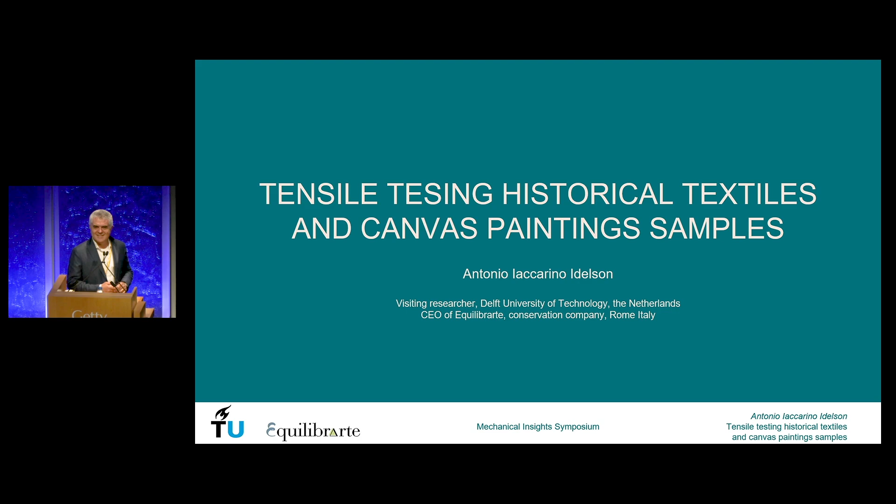So I'm going to present my PhD thesis, which I submitted in September and will discuss in a couple of months. This is a real first time for me, not only at Getty, but also for this specific subject, and I'm very pleased to do it here.

I really hope that the subjects I'm going to describe will open up for discussion, because one of the difficult things for me was that part of the research I've done did not find much correlation with existing literature. So basically, I felt a bit alone.

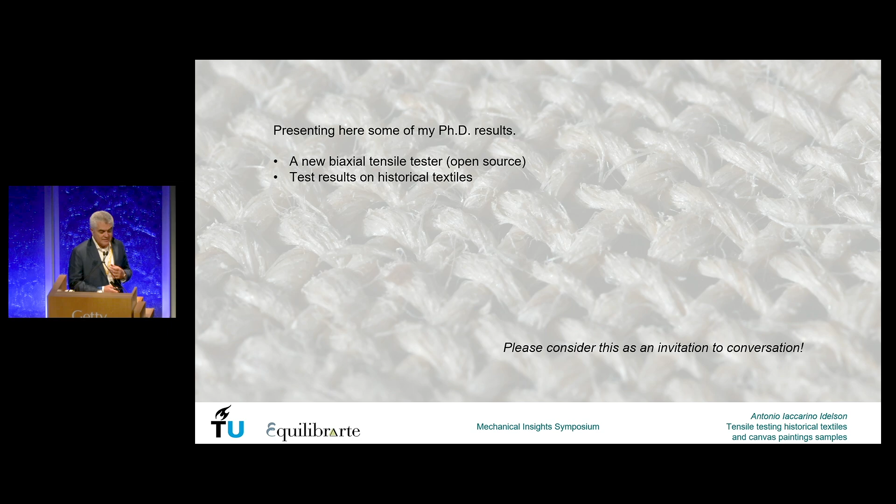The first part is going to be about the construction of a machine, which is not entirely new, because there have been several biaxial testers in conservation science history.

The other part is going to be the quantification of historical textile morphology. The point is that when I was about to test the mechanical properties of historical textiles, I realized there was very little literature about the quantitative description of the yarns inside the textile. I'll give a very short presentation of this, and luckily I have a poster with much more information, so hopefully we'll have time to discuss.

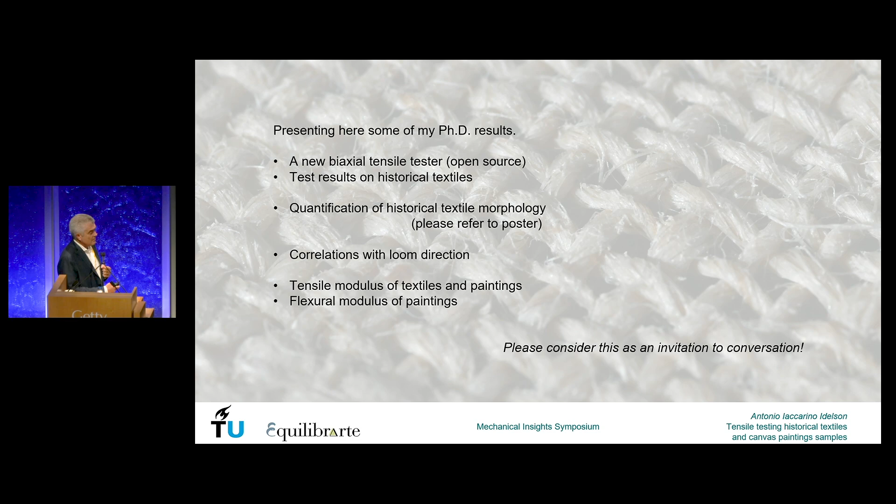The next important points are the tensile modulus of textiles and naturally aged paintings, and the flexural modulus of paintings. Let's go ahead.

This is the machine I built during the first year of my PhD. It was a collaboration with my precious friend, Dr. Miguel Sanchez at Polytechnic University of Valencia.

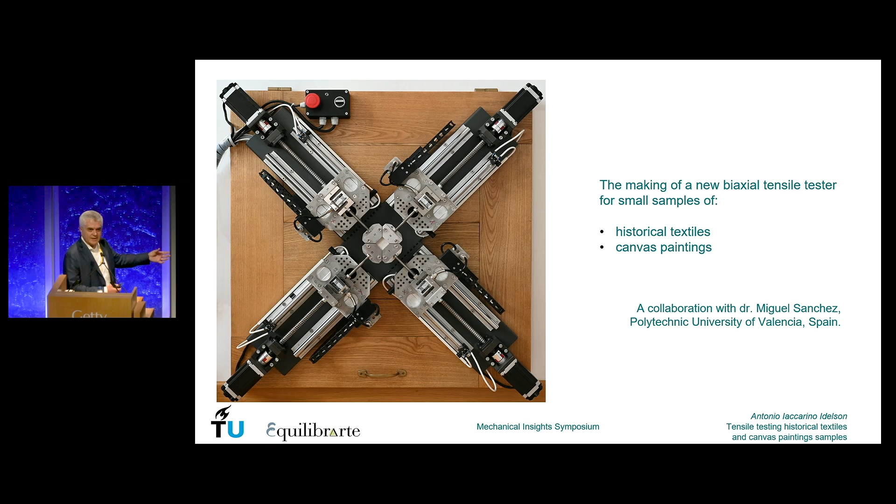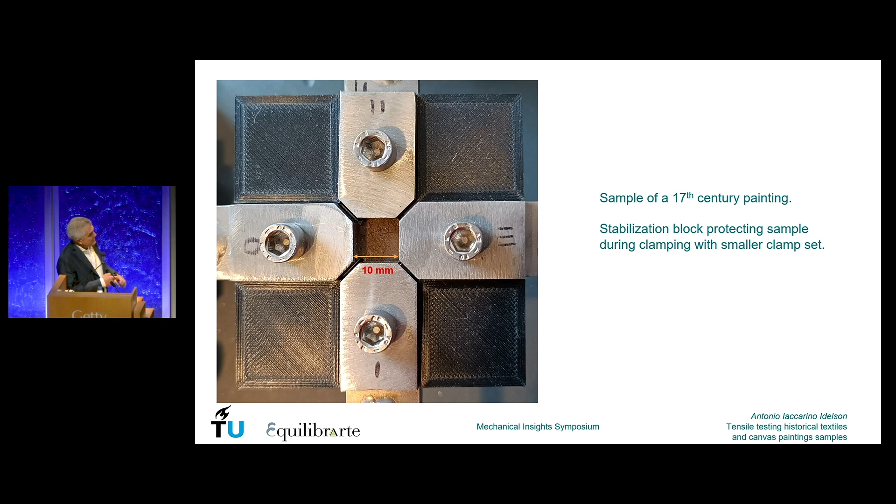We worked during COVID - I was in Rome, he was in Valencia, and he wrote the software while I made the machine. These are the small clamps for the sample, which is 10 millimeters wide plus a clamping area. For clamping it safely without damaging it, I built a 3D printed support so it can be clamped without damaging the paint layers.

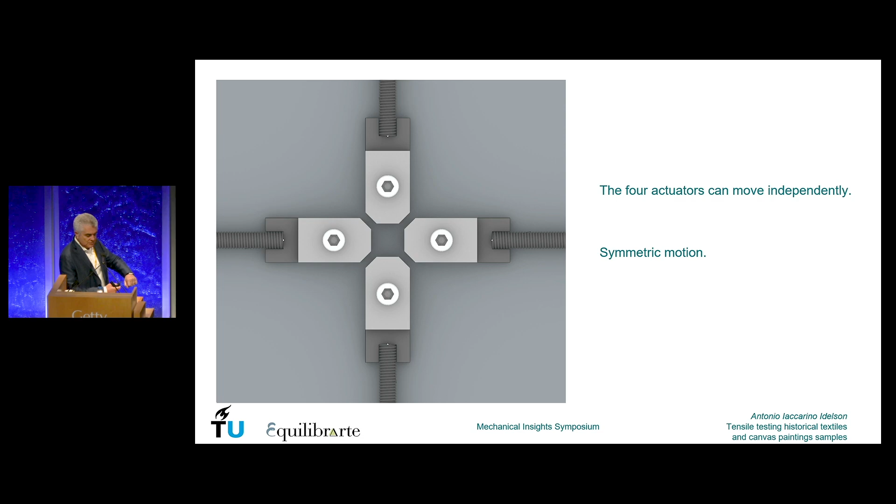The four actuators can move independently, with an asymmetric motion or with a symmetric motion. Asymmetric motion is useful for uniaxial testing, while symmetric motion is necessary for biaxial testing.

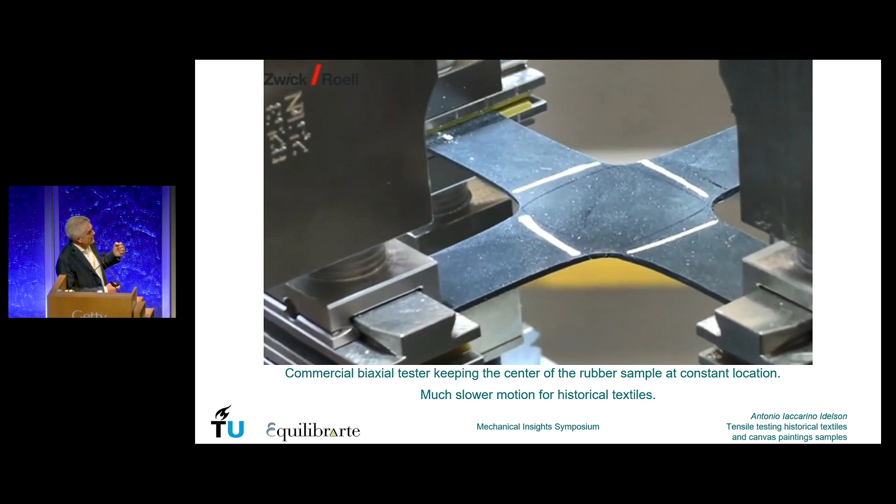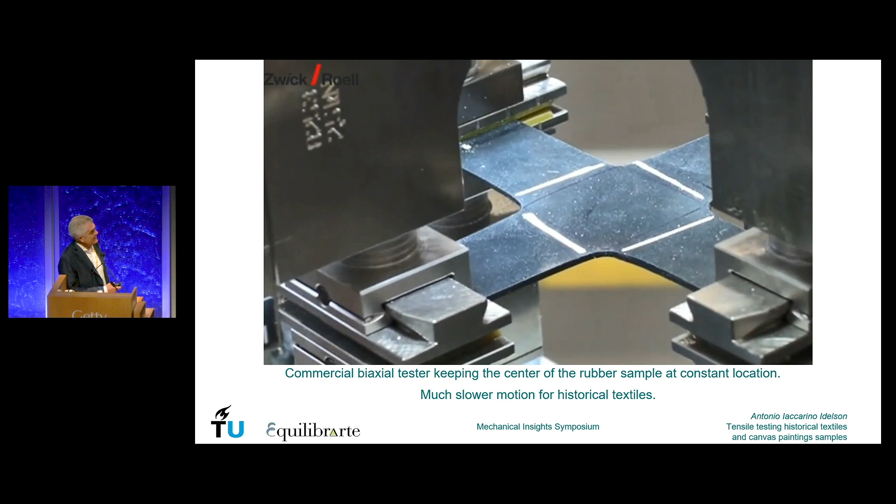This is a commercial biaxial tester with a symmetric motion. I showed this because you cannot do fast testing on an old sample, so this was available and nice. But the point is that when doing a biaxial tester, you want the center of the samples in the same location, because otherwise you get distortions.

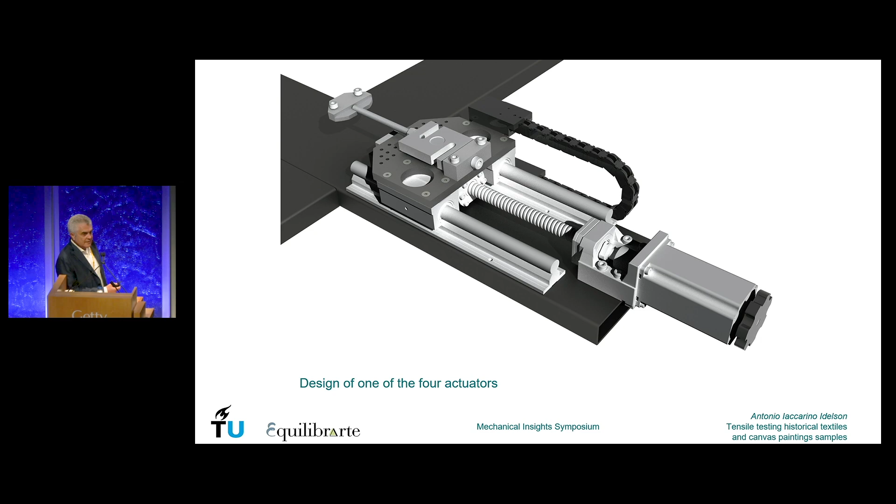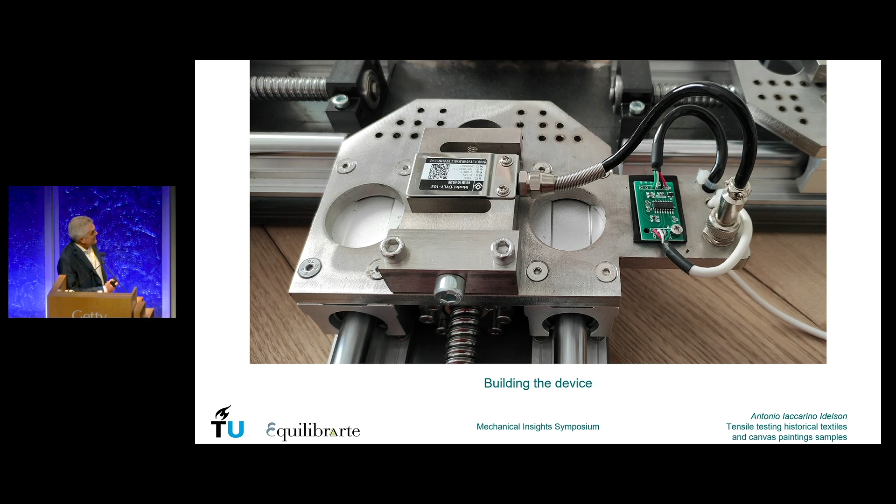This is the CAD drawing of one of the four identical actuators. I started from welding the steel cross, then had these parts laser cut and assembled - some parts were commercial, some were handmade.

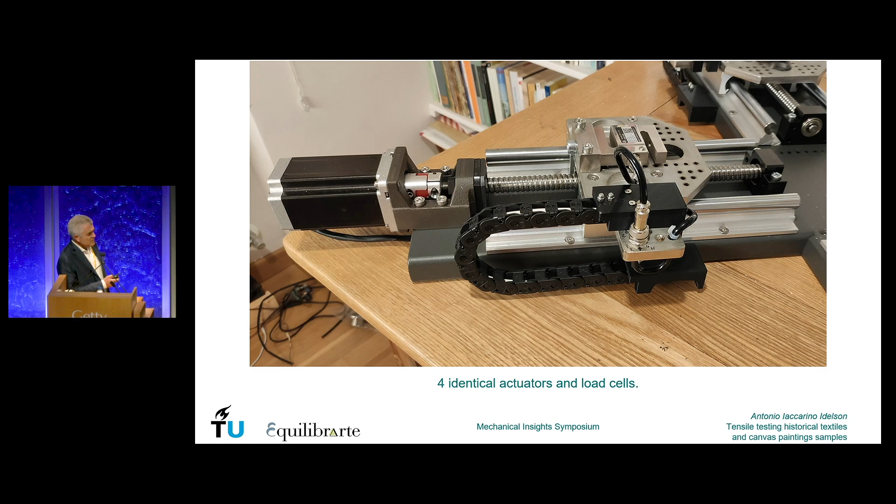This is the final execution of one of the identical actuators. You see that they have a load cell here, and each load cell reads the force on the sample.

In order to start with a symmetric disposition of the forces, we did a pretensioning algorithm that allows changing the force and position of each clamp at all times, for a relatively short time. In 100 seconds, you get to the pretension mean value of 0.3 Newton per centimeter, which is a quite low force - good for starting always in the same conditions.

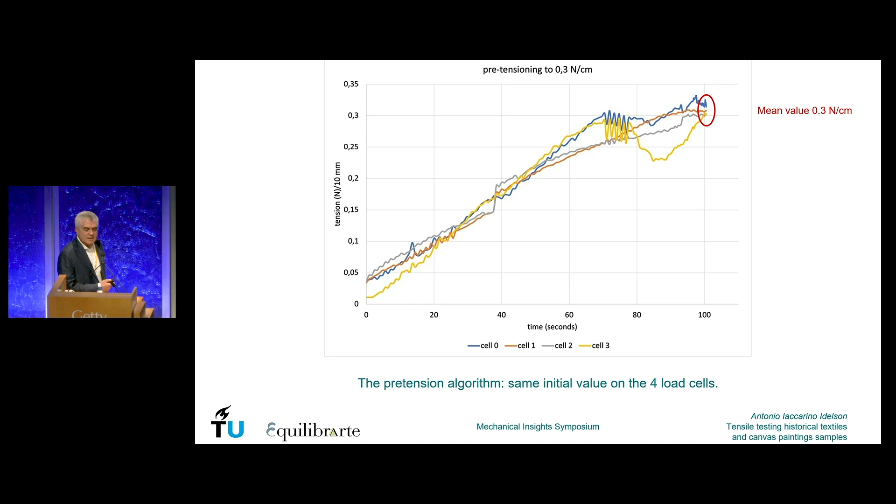So why was a new biaxial tester needed? The point is I'm a PhD student, but I'm also a conservator. I've been 35 years in conservation, and I started doing research on elastic tension of paintings in '92, when I was a student, and I never stopped basically.

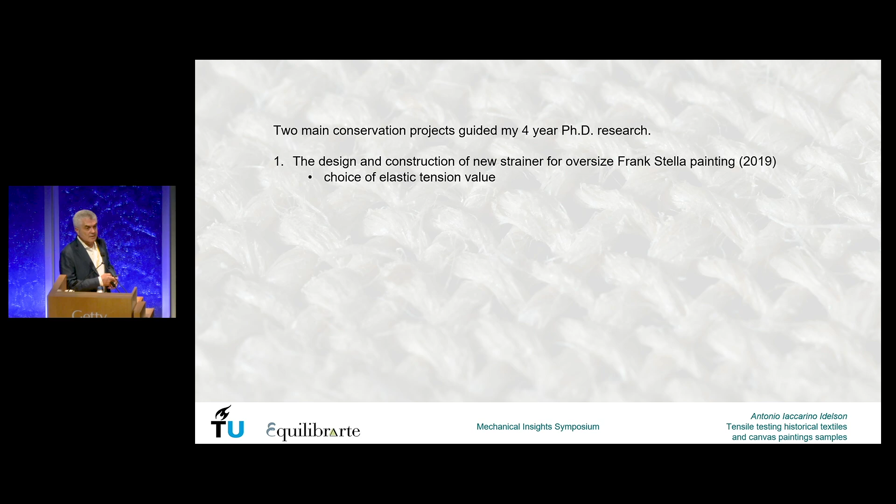My PhD research was based on two major conservation projects. One is the design and construction of a new strainer for the oversized Frank Stella painting, part of the Getty Conserving Canvas project in Santiago de Chile. The other is the design and construction of a new strainer for Rembrandt's Night Watch, and also the choice of the elastic tension, the value of the force.

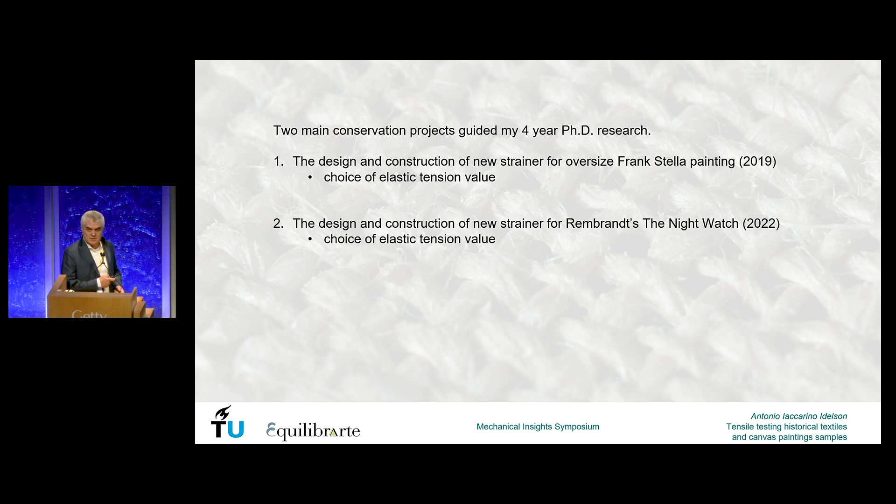Of course these are not very easy tasks, but I had enough experience for approaching them. The point is that I will show you what happened in the meantime.

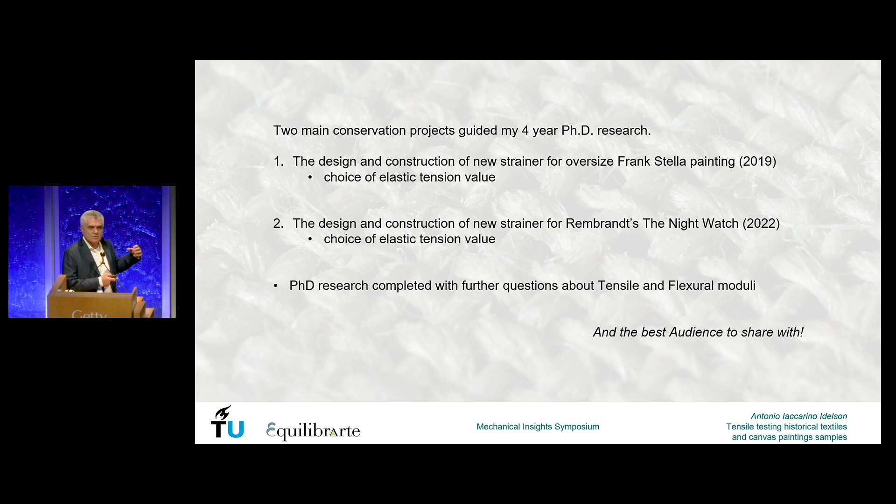This left me with two major questions about the tensile modulus and the flexural moduli, because it's not so easy to calculate them and use them for digital models, as we have seen already this morning.

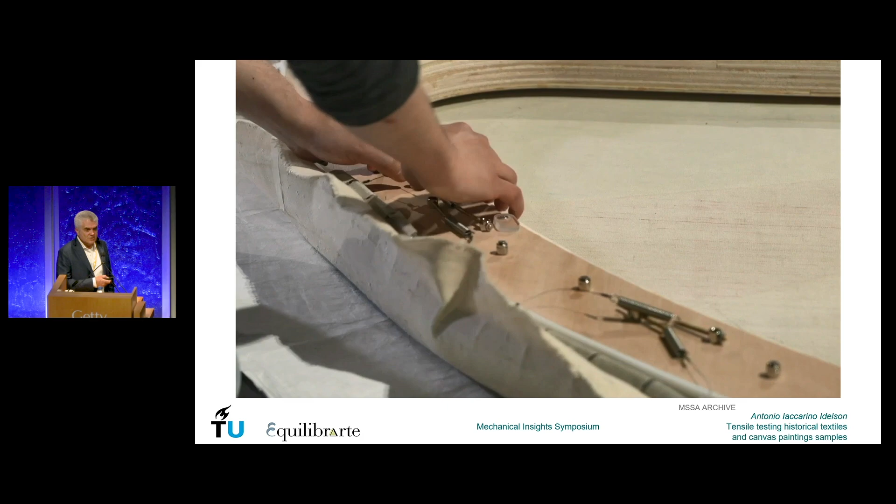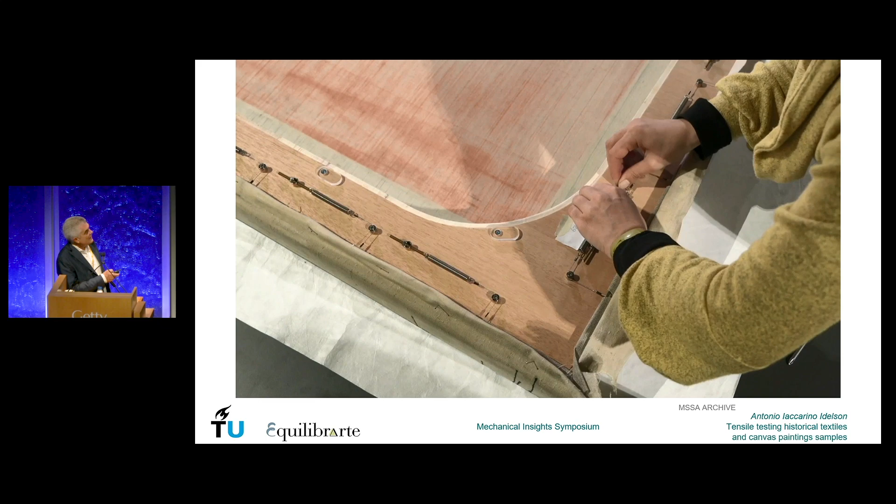This is the Frank Stella painting, and we did the tensioning system with springs that allow measuring the force. Here is the length of the spring for that location, and once you have the force selected, you can do simulations and predictions of the behavior of the painting.

So what we did was a simulation of the forces needed that were optimal for the painting, before I went to Santiago.

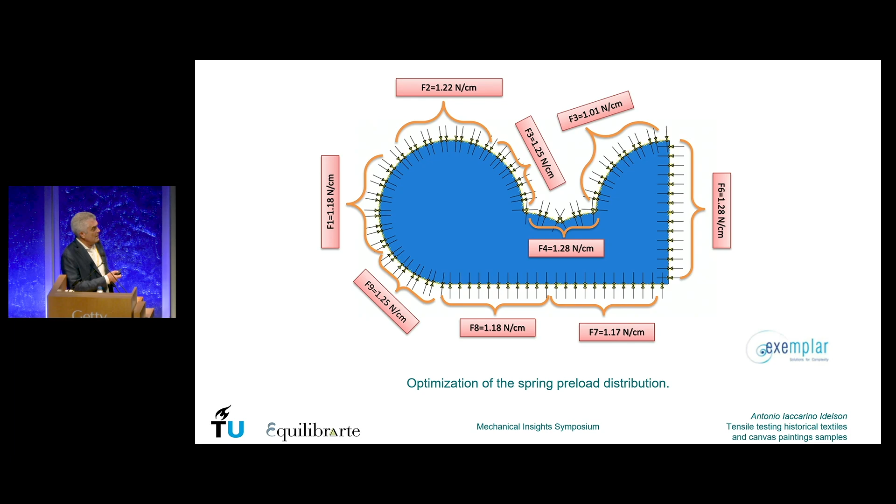Then when I arrived in Santiago, I was confronted with this prevision of the elongation of the painting, which was wrong. I mean, it didn't match with reality. I didn't see that much deformation in the painting.

What happened is that I had done uniaxial tests on samples of the same canvas with Alain Roche, who unfortunately couldn't come to this symposium, and we did it in warp, in weft, and at 45 degrees, and all these numbers were put into the FEM model.

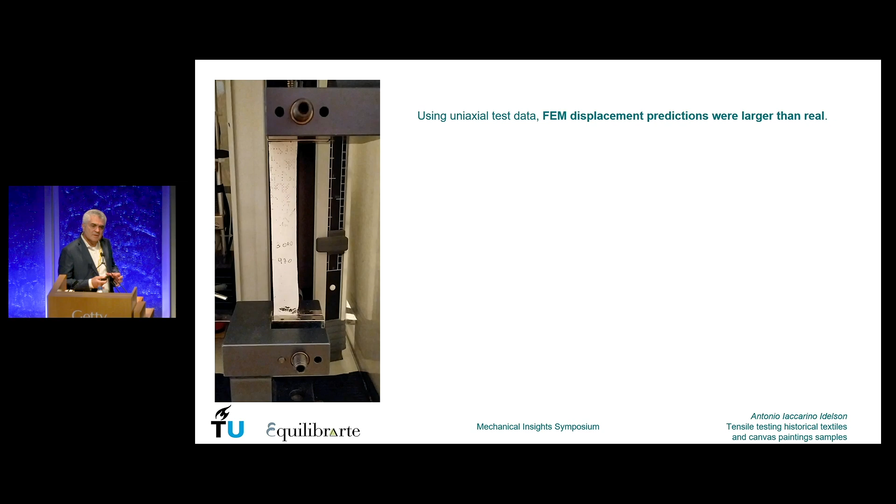But what happened is that the deformations were much larger than the real ones. So when I was there, I tried to figure out with the engineer in Torino what happened, and then I realized that as everything was okay with the model, the problem was with the uniaxial testing.

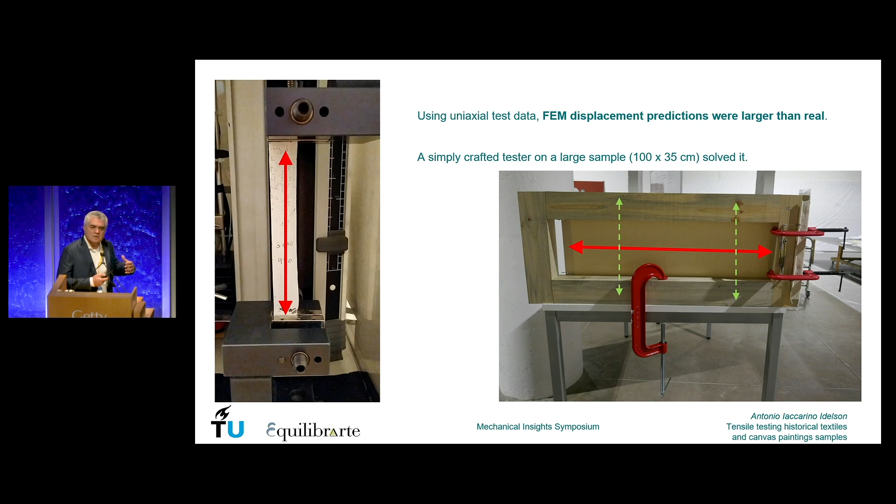So I built a biaxial tester with pieces of wood and springs and a caliper, and I did it in one day. The numbers I got with a much larger sample, 100 by 35 centimeters, even though it was a rougher estimation, were good enough to make the model fit. So I realized that a biaxial tensile tester was needed.

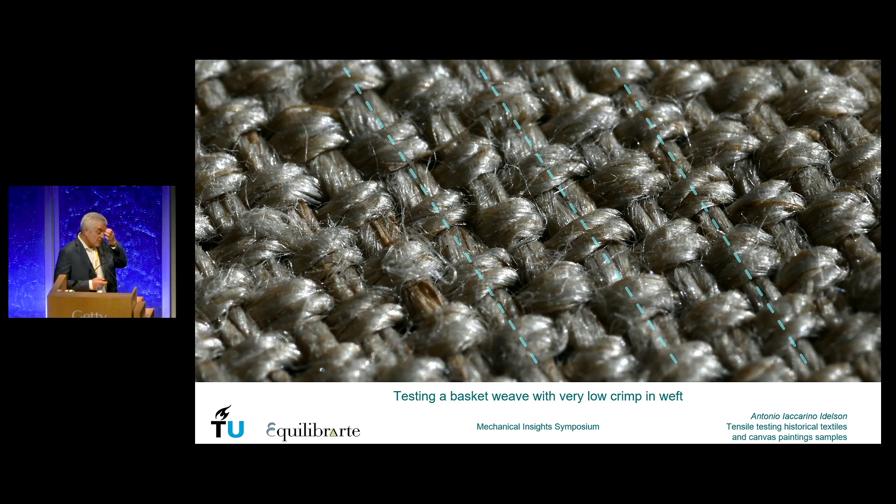This is a piece of basket weave lining canvas, which was actually used for the Night Watch, but we're not going to discuss this right now. You can see it has a very different shape in the yarns. These are the warp yarns; they are very crimped, and the weft yarns are very straight.

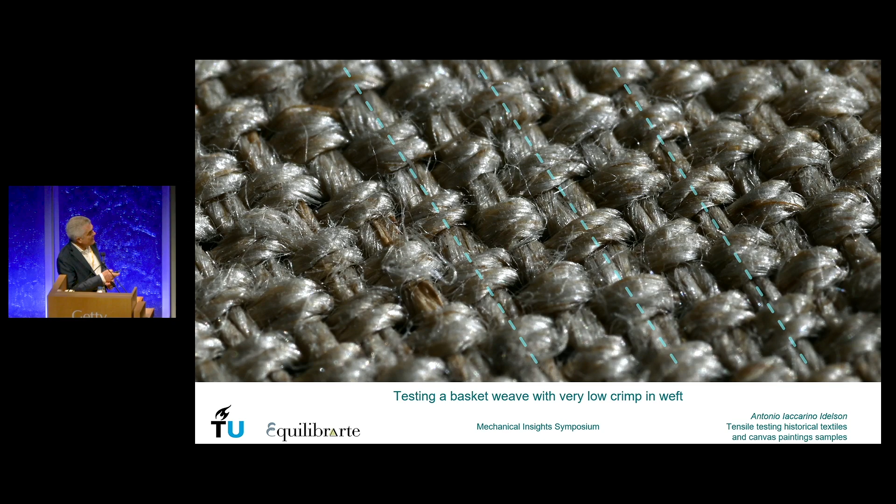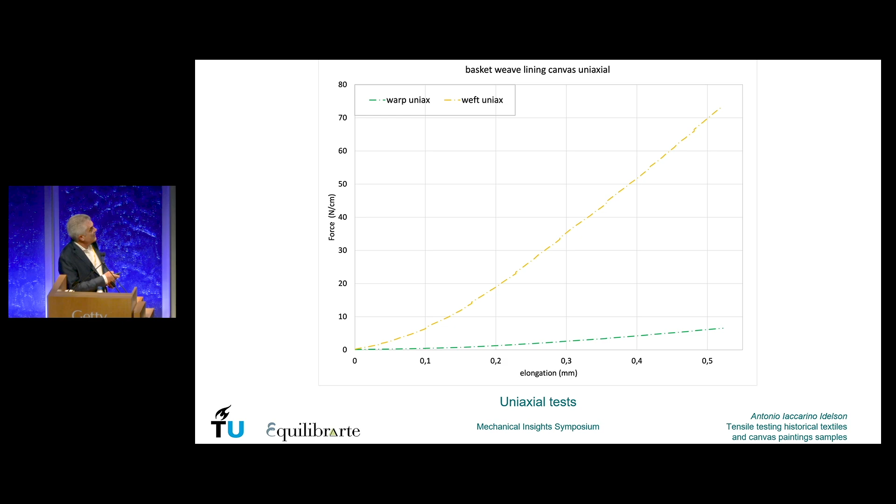If we do a uniaxial test, we see that the warp yarns are much more giving because they have a very important decrimping phase, while the weft yarns are much less so, they react more quickly. If we do a biaxial test on the same canvas, we see there is stiffness transfer: the warp yarns are a little bit stiffer, and the weft yarns lose some of their force.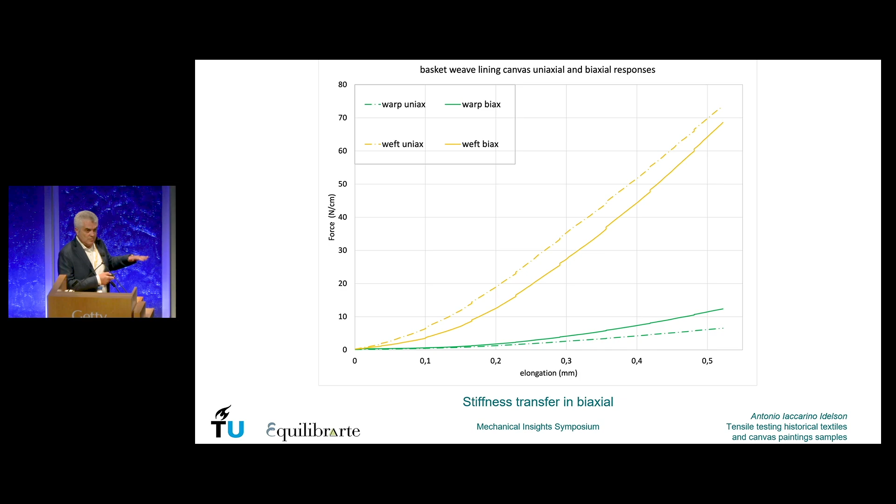If we look into the crimp values, we see that the weft yarns have only 1.6, while the warp have 7. This big difference makes the difference.

What was very interesting for me was not only to discover this, because it's been anticipated in many studies before, but that I measured the value of crimp in the canvas.

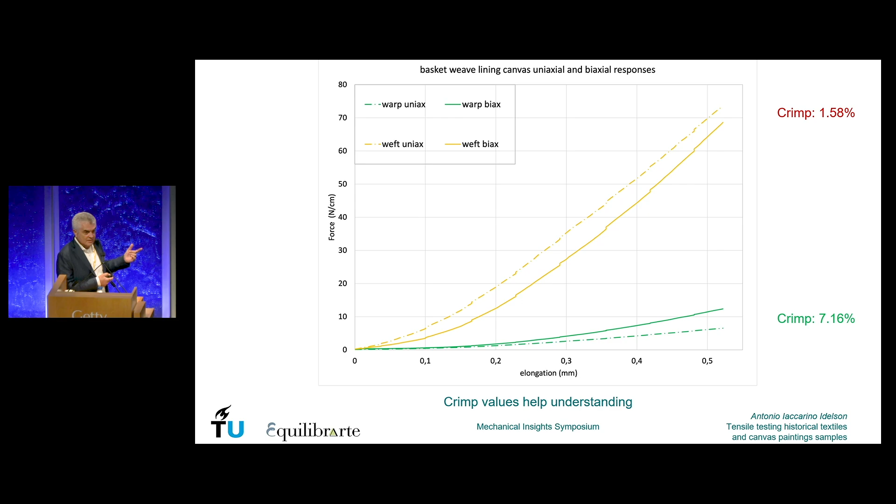Looking into 26 samples of naturally aged, old canvases, most of them from paintings, you see this is the full list, and we have the dates, and this was the lining canvas we saw just a second ago.

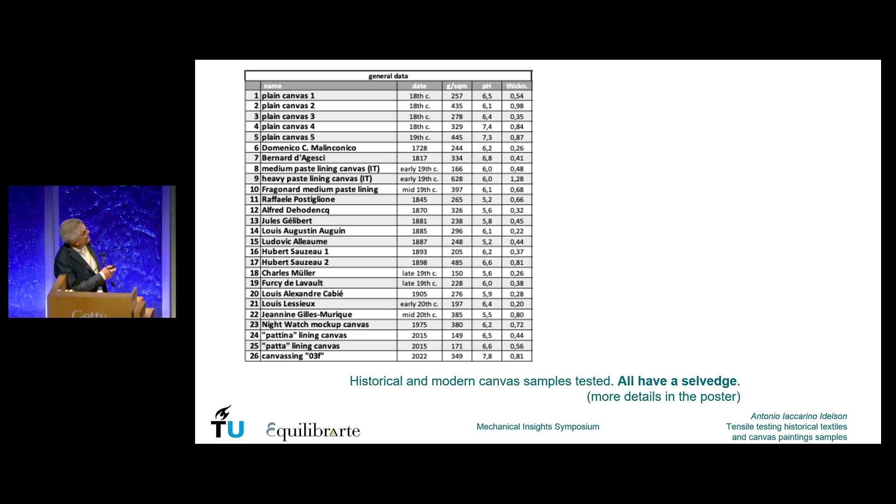Here we have general data like date, grams per square meter, pH, thickness of the canvas, and then we have the yarn width, which is not very commonly measured. I managed to do a sort of small statistical evaluation with at least a weighted mean.

I'll show you later. And then the yarn thickness also, because the yarns have an elliptical shape: the major axis is the yarn width, and the yarn thickness is the minor axis of the ellipse.

Then we have twist per meter, which is also very hard to find in the literature, but I found a 1973 paper that allowed me to do the measurement.

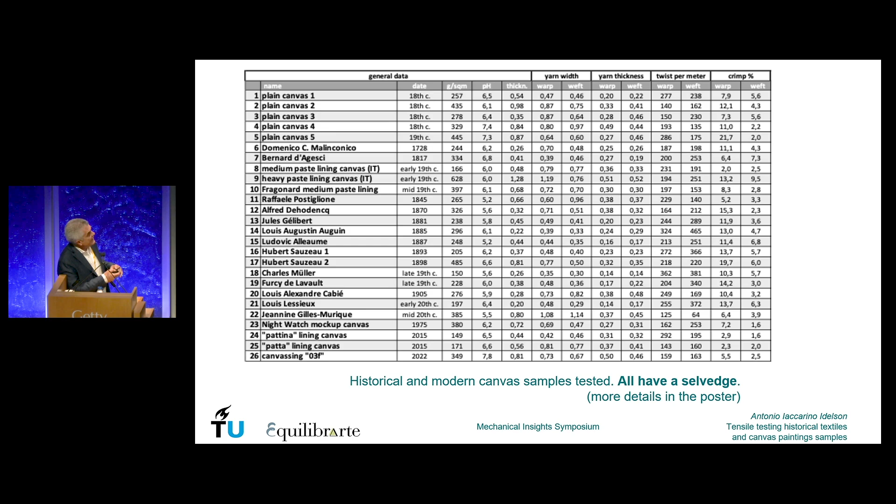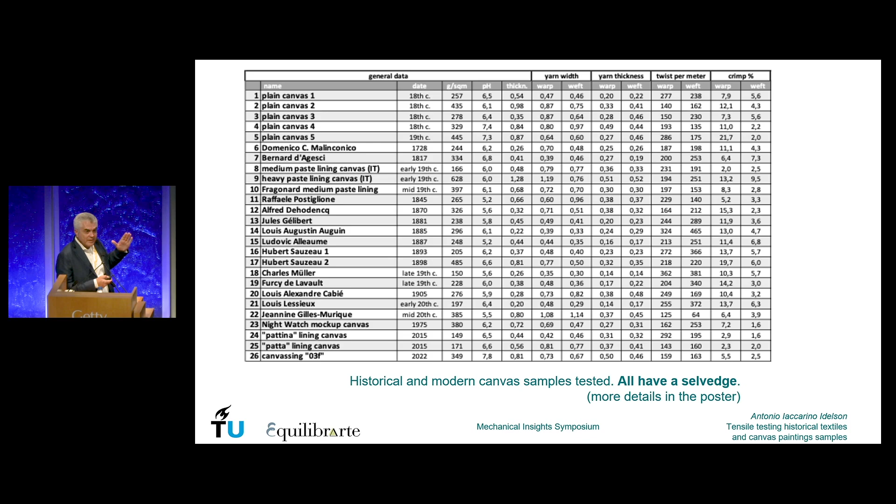And then the crimp, which is also a relatively complex thing to measure with old samples. Christina Young and others had used the Peirce model, which worked very nicely for modern canvases, but I tried it on mine and it was not working. I started again, it was really painstaking, and in the end I realized it simply did not apply to very complex waveforms, so I had to find another way.

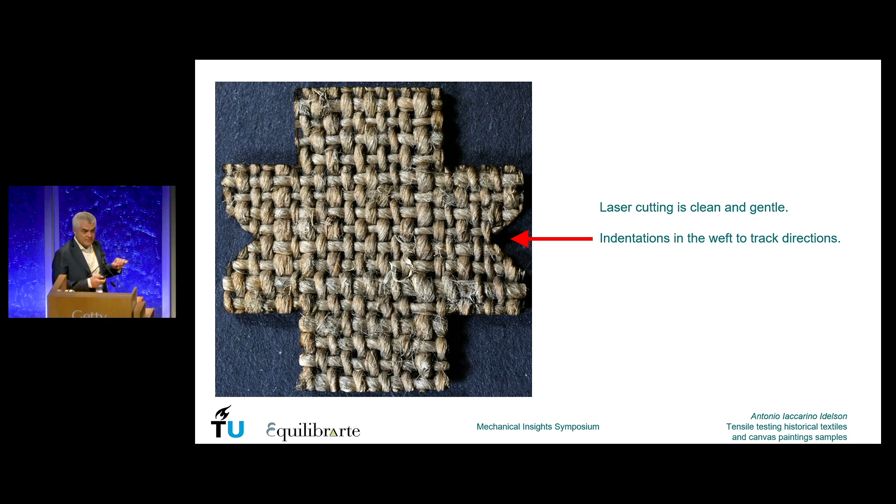And then the thread count. The samples are all laser cut, because laser cutting is gentle and doesn't cause mechanical damage to the samples. I draw indentations in the weft direction so I don't get confused when testing them, and keep track of the direction, with identical testing areas.

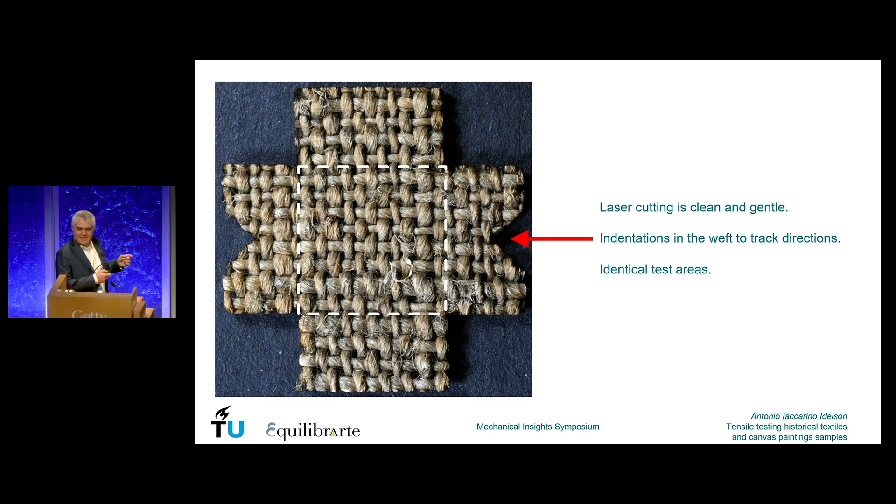So the weft yarns have higher modulus in 92% of the cases, that's 24 out of 26, in both modern and naturally aged old samples.

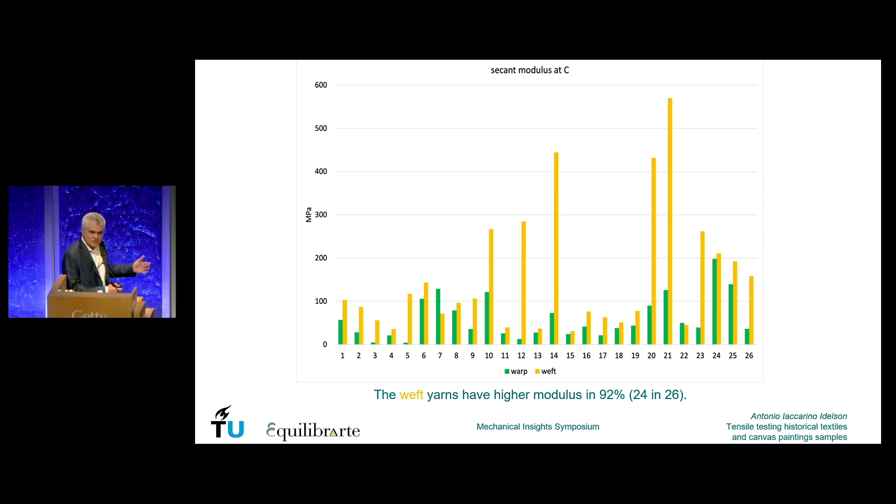If we look at the behavior of the decrimping zone, we see that crimp is definitely playing a role. And if we look at the crimp in the weft yarns, we see they have lower crimp also in 24 out of 26 samples, so we have a direct correlation.

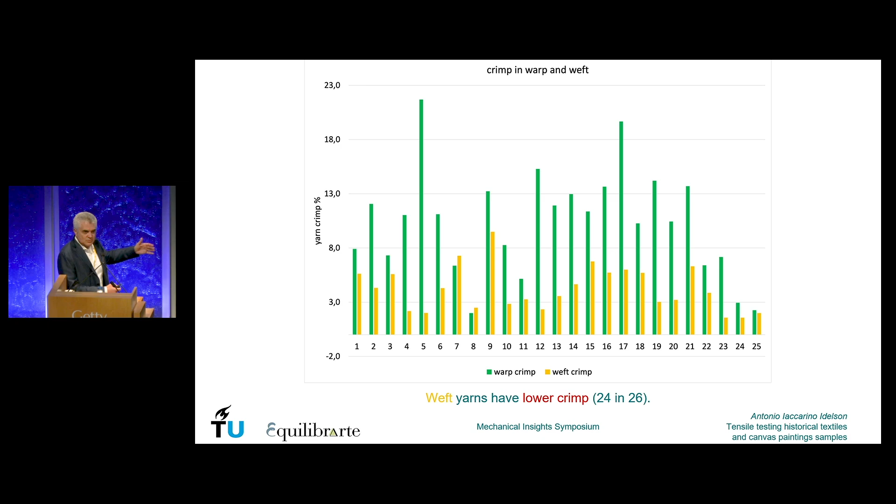I found many direct correlations like this, which I don't have time to show you here. But I wanted to get to the problematic part of the talk, so here I would very much like to have feedback.

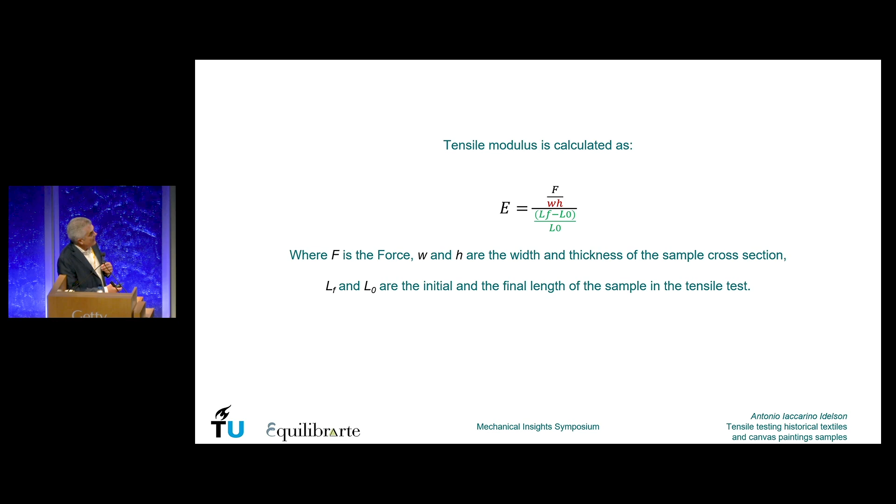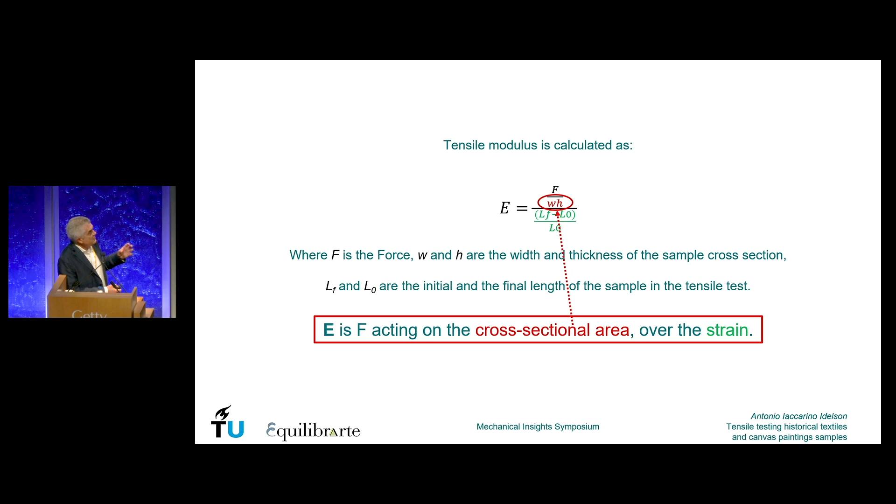The point is that when you measure the E modulus, you have force over the section and over strain. So basically, when you change the cross-sectional area, with the same results on the rest of the formula, you change a lot the stress, and so the E modulus.

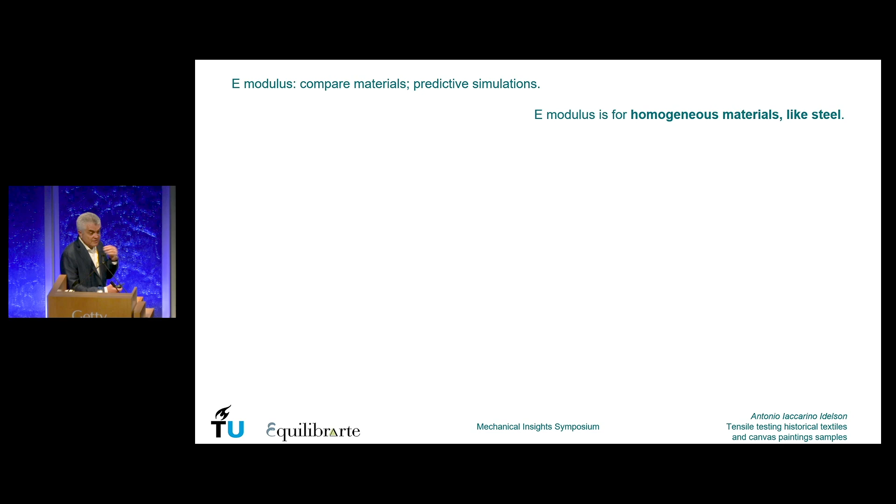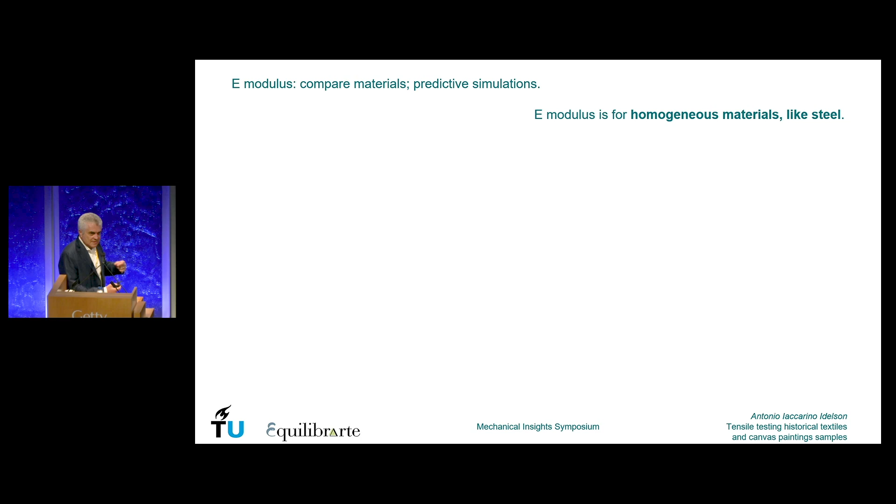The other point is about E modulus. I'm not an engineer, but I learned this at my expense. E modulus is made for comparing materials and for predictive simulations. But this is made for steel or similar things, not for canvases, because canvases have a lot of voids inside, not only between the yarns, but also within the yarns.

So there were several calculation methods over time to extract the cross-sectional area of the fibers.

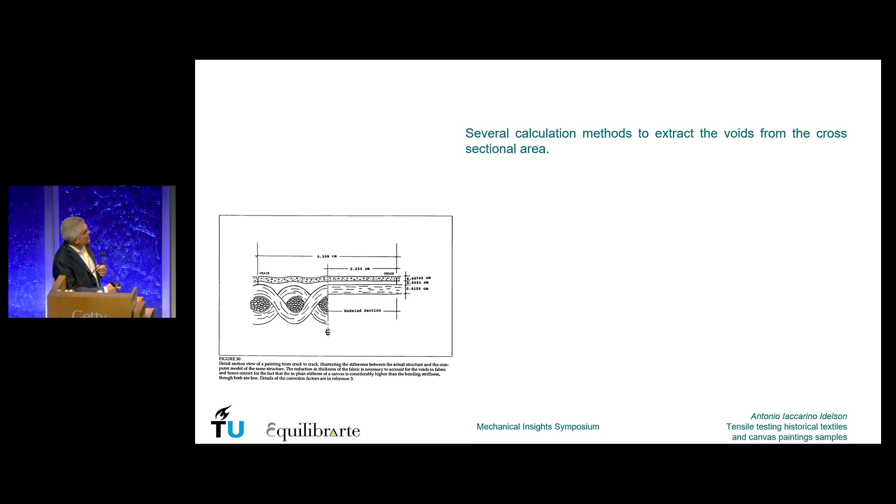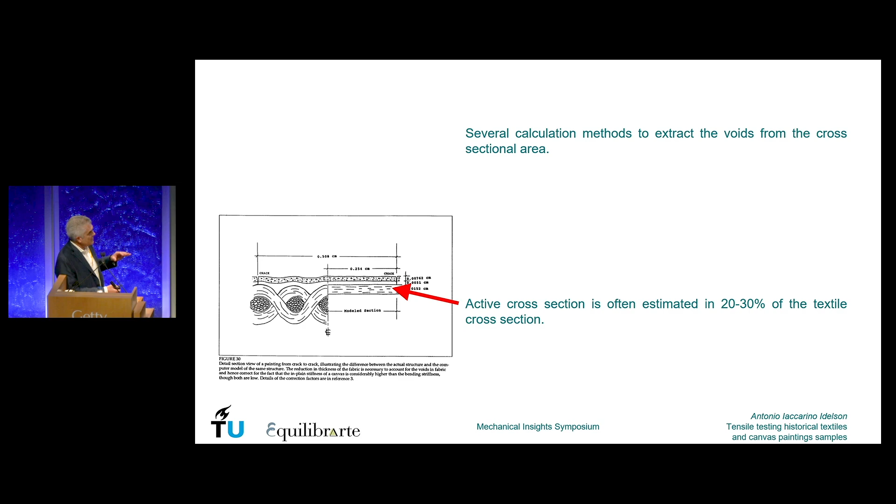We had interesting discussions with Emanuela a few months ago, and this is Marion Mecklenburg's approach from Art in Transit, 1991. After that, basically, the estimation is around 20 to 30 percent of the textile cross-section.

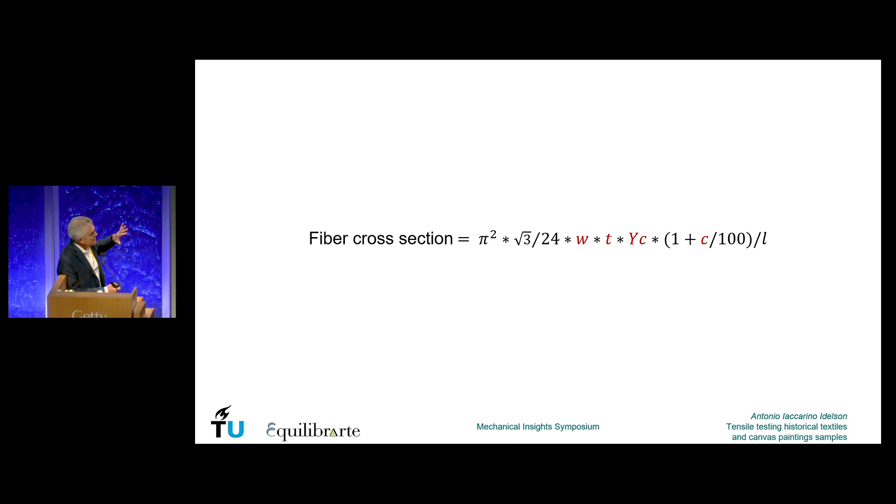So, as I had all these numbers about the textiles I studied, I devised this very simple equation, based on the tables I showed you before. The values in black are all constants, and the red ones are variables extracted from the tables. So we have the width of the yarn, the thickness of the yarn, thread count, and the crimp.

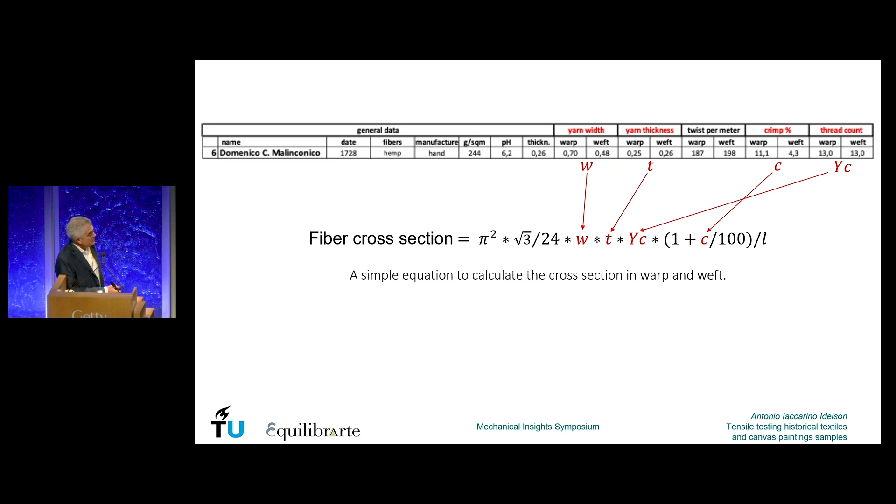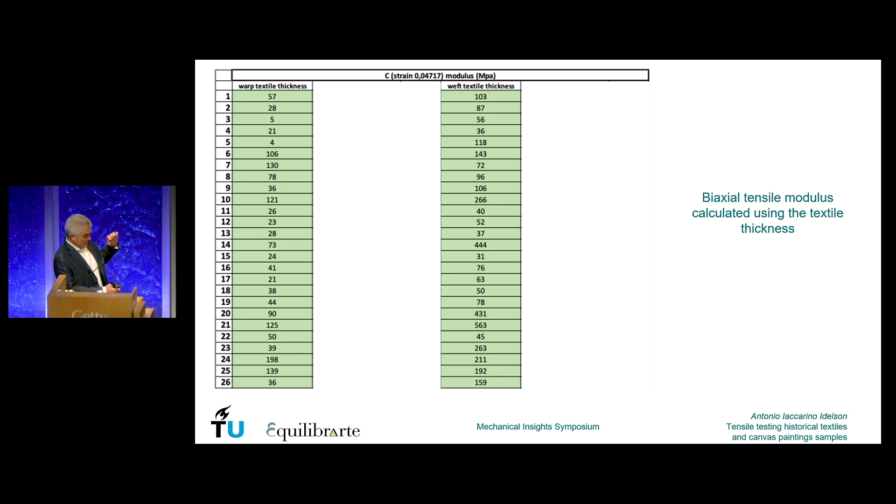Using this, you can see the difference between the E modulus of the 26 textiles measured using the thickness of the textile measured with the micrometer, or using the fiber cross-section calculated with the equation I'm proposing here. Basically, you see that there is a major increase in the elastic modulus, and this is the ratio.

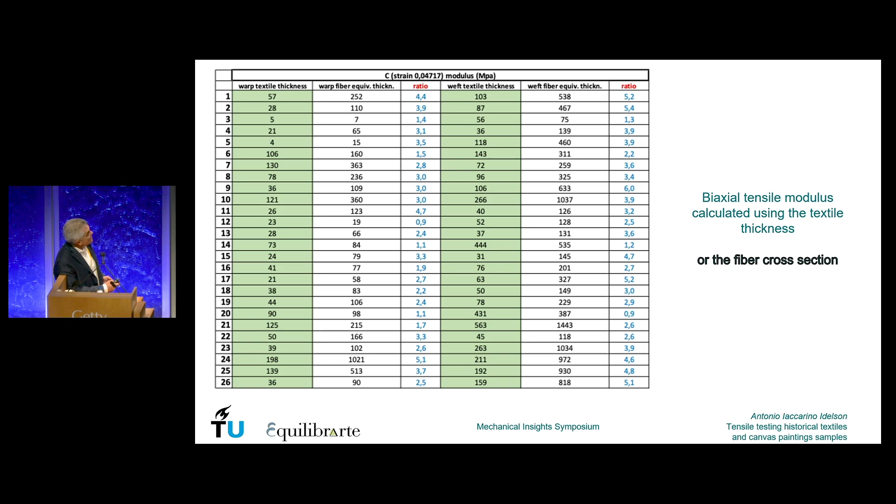So we see that this is not neutral. What happens is that testing samples of paintings, as I have about 100 for the moment of old paintings with a date and all the historical data available, I'm just starting now. So basically, I started from the simple side, just the canvas.

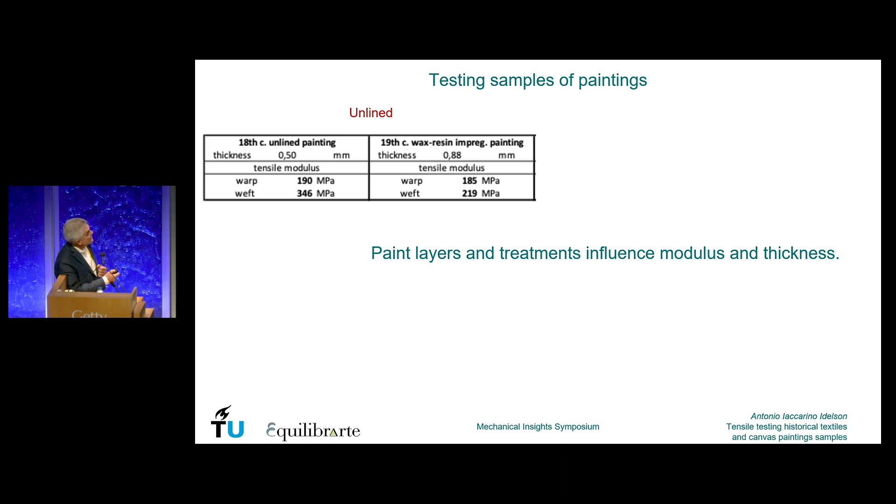Now, when you have to add the paint layers, here we have two unlined paintings with paint layers on, and this one also has wax resin impregnation. So the elastic modulus changes, and the paint layers and treatment influence the modulus and thickness.

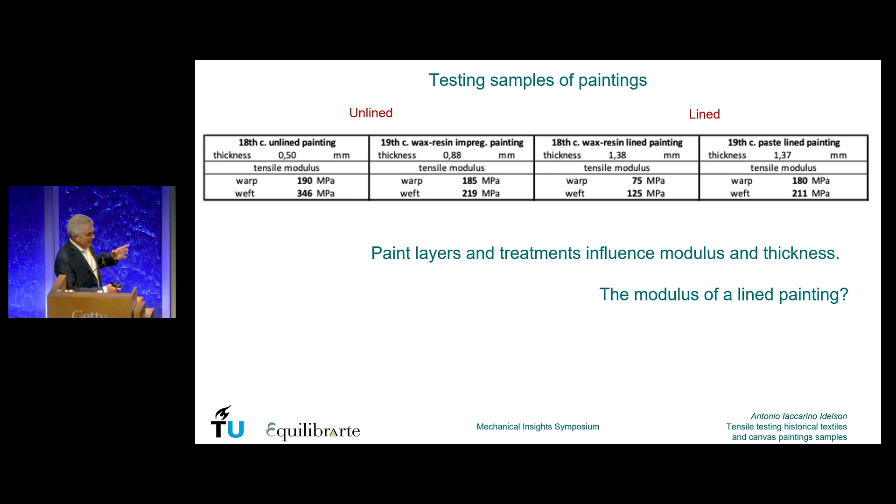So what about a lined painting? What shall we take? The two canvases, one canvas, only the lining canvas, the paint layers, the adhesive? It's a relatively controversial thing, because here we have the numbers for the material's actual thickness, but how shall we calculate it? This is definitely an open question for me at the moment, and I would very much like to discuss it.

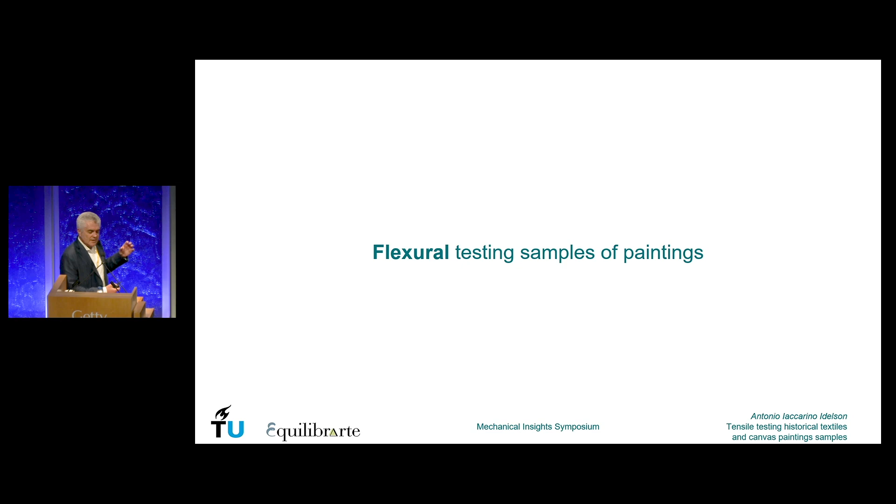The other point is that I did build a flexural testing tool for my biaxial tester using only one of the actuators. This is a very simple device. I just made a 3D printed block, a rest for the sample. The sample is very small, of course, because it's a real painting.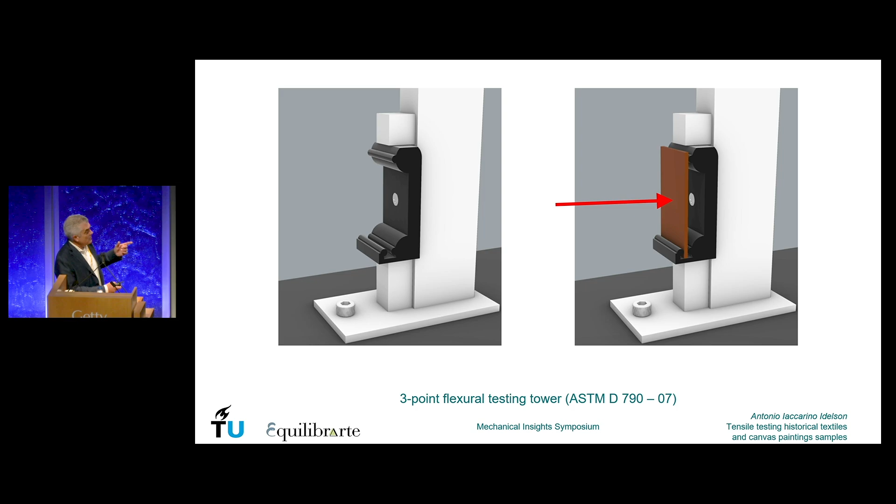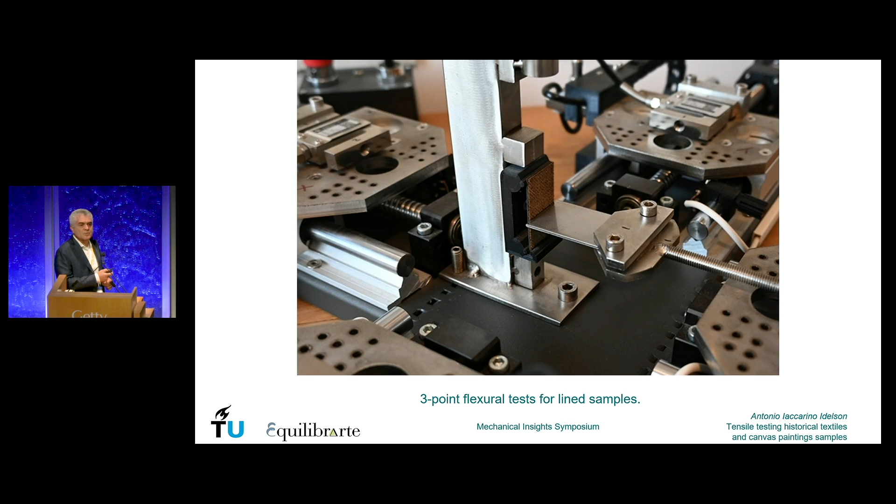In this case, we are going to see the results for a mock-up I made for the Nightwatch. This is the Nightwatch lining canvas, the 1975 lining canvas, and this is a 17th century painting lined with the same procedure and materials used for the Nightwatch in 1975.

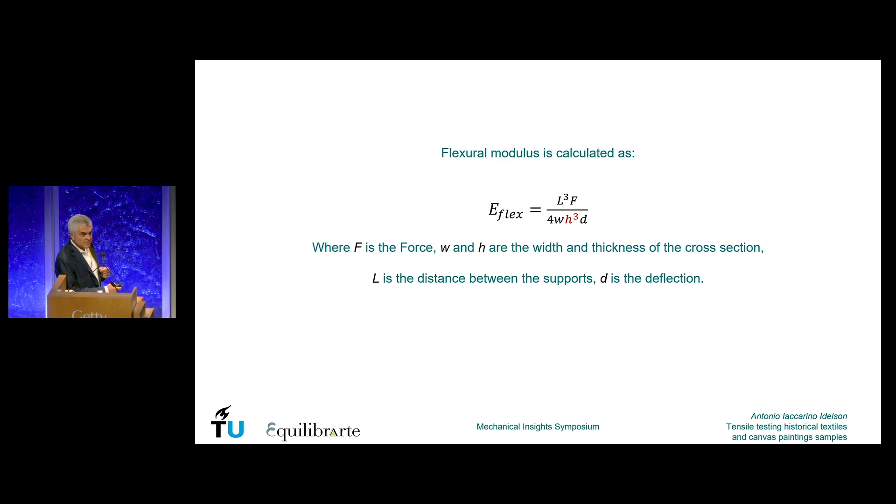So this is the result of the test, and this is the way the flexural modulus is calculated. You see that the thickness of the sample plays a major role because it's at the third power. Now let's have a look, because time is running, at the result.

Basically, using the actual sample thickness, the mock-up thickness, we have a flexural modulus that is all right. It's so right because it's not far from the tensile modulus, so it's something that you may expect to have.

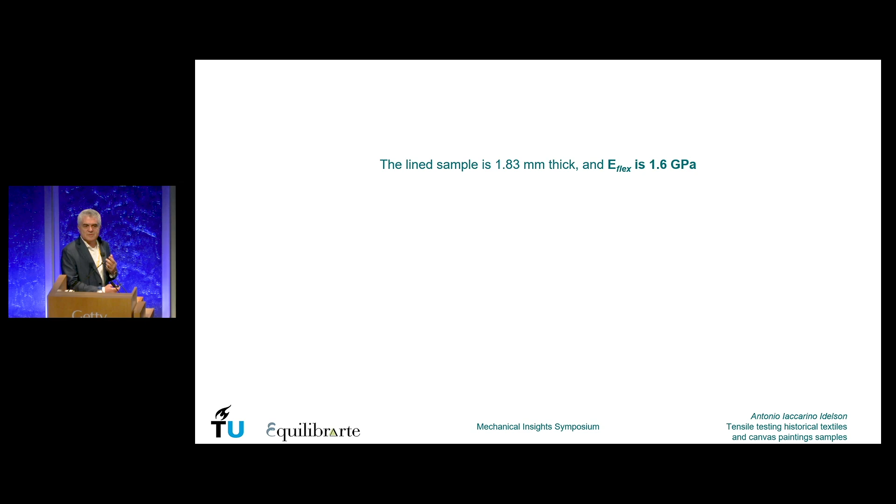But still, I only found one literature reference. I would be very grateful if someone told me that I'm wrong. I couldn't find any others. So let's see, if we only used the equivalent cross-section of the fibers for the two textiles.

And the additional paint layers on top, we would reduce the thickness from 1.83 to 0.78. And the flexural modulus would become 20 gigapascal, which is like oak. It's a bit too much for a painting, isn't it?

And if we just used the lining canvas fiber section and the paint layers, with just a slight reduction, we would have 38 gigapascal, which is the expected flexural modulus for fiberglass epoxy composites. So we're completely out of scale.

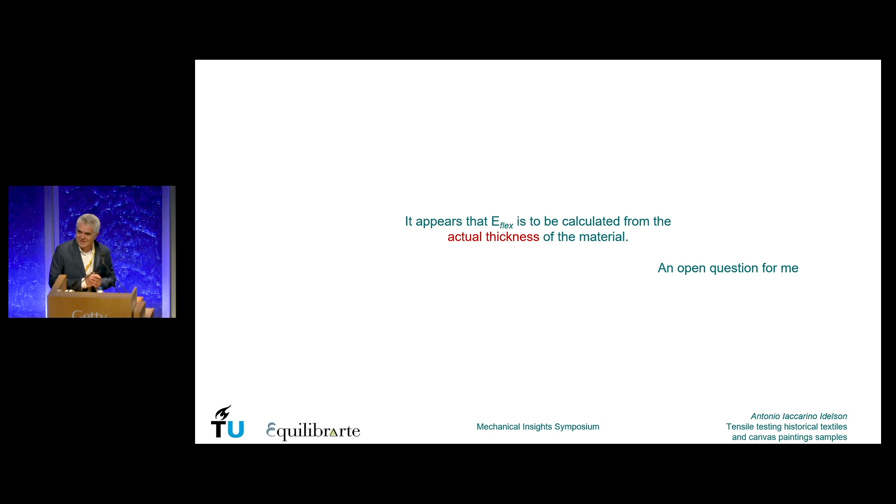So far, it seems that for the flexural modulus, the most reasonable thing to do is to keep the actual thickness of the material. But this is an open question for me, and for you as well, please. Okay, thank you.

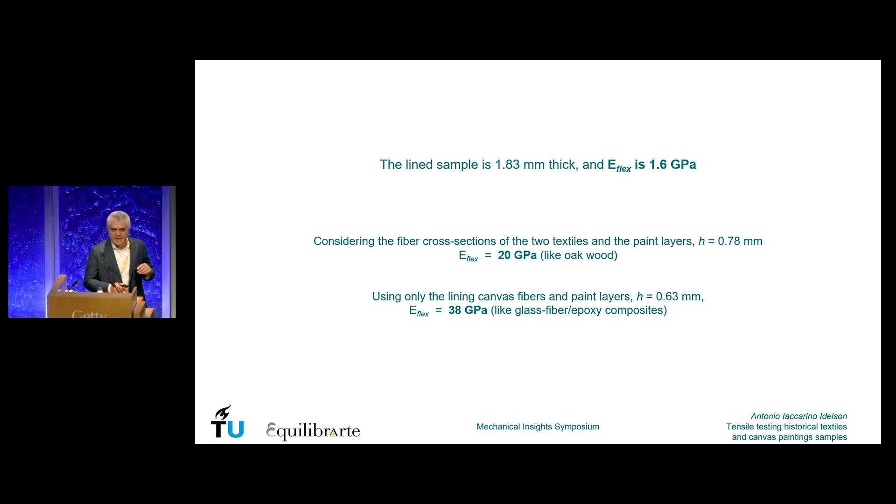Okay, I'm not sure I heard you, but I'll try to reply. I think I understand. So in this case, we are using it as if it were a continuous material, but it's not, definitely, because it's two canvases with wax resin inside and paint layers on top.

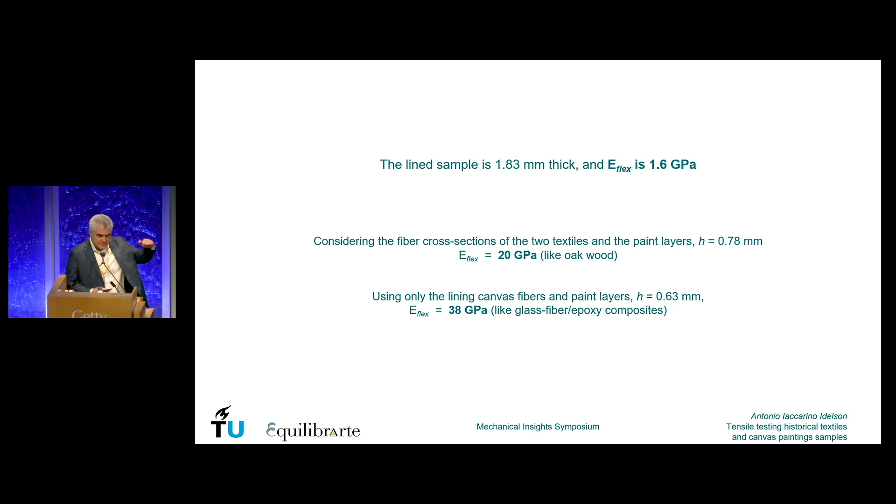So, you know, if you're bending it from the back, basically you are compressing the lining canvas and putting the paint layers under tension. So I mean, it's a complex thing to think about.

And so, yeah, but my point is, because you have a complex phenomenon, you are applying maybe a too simple model to calculate your E-flex. Does it make sense to you what I'm saying?

In wood science, that's what we do for panel paintings. We consider that the gesso layer, the paint layer, and the wood are attached to each other to calculate E modulus from one layer in general, like you did. We measure one modulus from a general test, and then we calculate theoretically what's happening in individual layers.

Yeah, but those models, I think they are a bit too simple for your case because your material is not continuous. It's fibers, as you said, it's woven samples, and maybe you need another approach, like with more modeling and so on, to calculate your E modulus for individual materials. That's why it's just a suggestion. I don't know the answer.

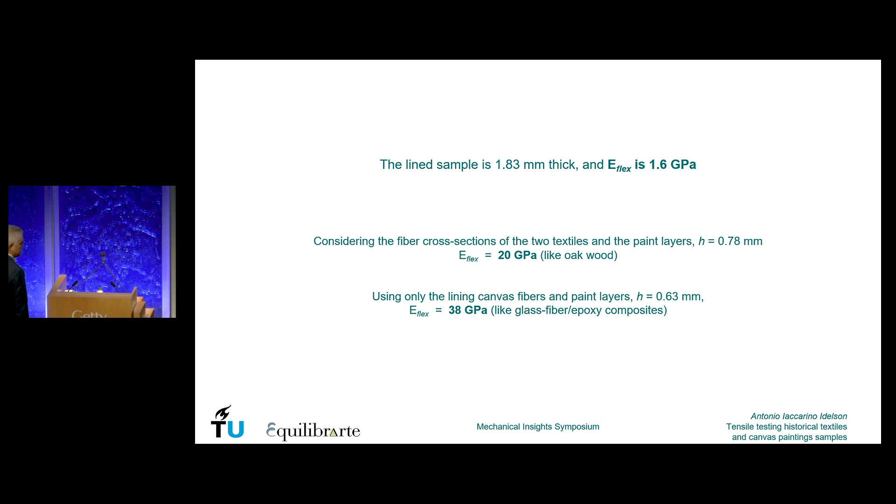And there are issues there, because in the textile industry you're going to have a more uniform yarn over a longer length and distance. But the tenacity might be one way of approaching some of your calculations, certainly in tension.

Yeah, okay. I didn't think about tenacity, but I did think about the linear density. But the linear density is extremely difficult to calculate if you have... I mean, I tried, but it's very difficult to calculate if you have a very small sample, because linear density in the textile industry is normally calculated on spools of 1 kilometer of yarn.

Yeah, a kilometer. Yeah. So, and also yarns in a naturally aged canvas are contaminated. So you would get sort of a wrongish number. Yeah, it's a good point. As you say, they are potentially contaminated.

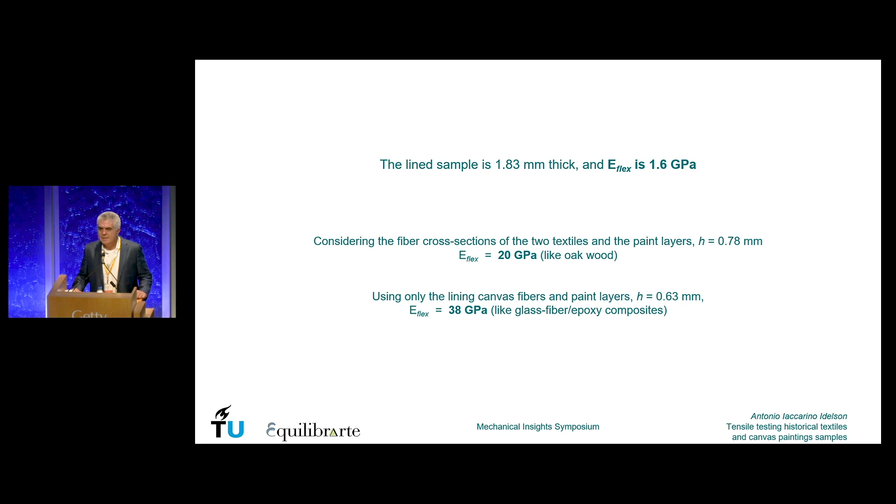But certainly it looked like you had quite a lot of material, so there might be an extrapolation out. Maybe it doesn't have to be tenacity in its purest sense, but a modified calculation that accounts for a reasonable length of material might be something you could think about. Thank you very much for your remark. I would love to discuss it privately, because I'm running out of time. Okay.